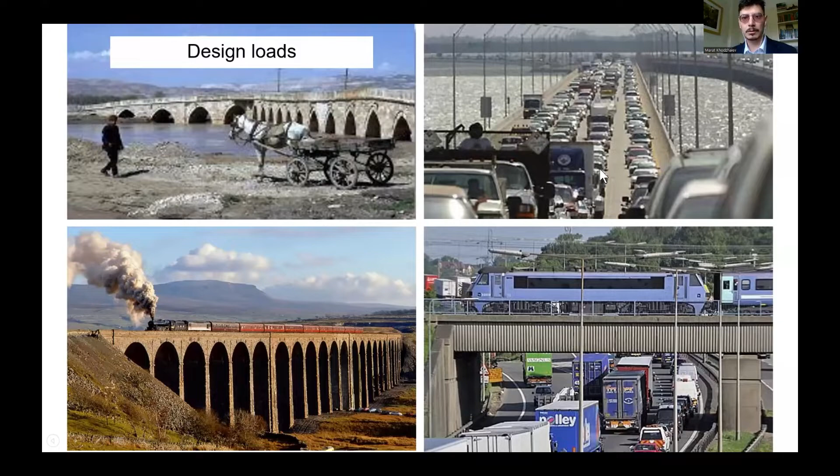So in the UK, I don't know about Ukraine, but about 40% of our bridges are masonry. В Британії більше 40% мостів кам'яні. Could I ask if you've got stone bridges, masonry bridges? Masonry is brick or stone. Do you have many in Ukraine? Чи є в Україні мости кам'яні, тобто кам'яні і цегляні? Це питання до аудиторії.

So I will answer. Yes, в Карпатах, зокрема, наприклад. There are some bridges in the region of the Carpathians, hilly regions. Є такі мости, але їх значно менше, ніж 40%. Okay, excellent, thank you for that.

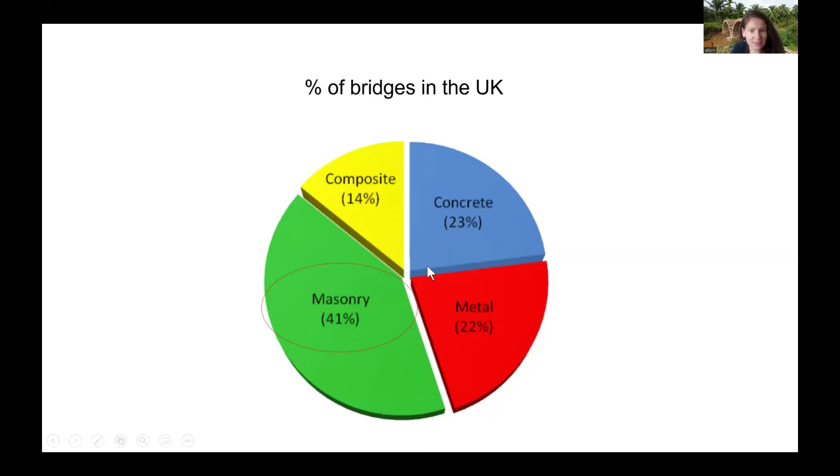So around the world, these bridges have only been built until the 1920s. В світі ці мости будувалися до 1920-х років. The technology was replaced by concrete and metal, which were quicker to build at the time. Технологія була замінена мостами із бетону і сталі, що було швидше у той час.

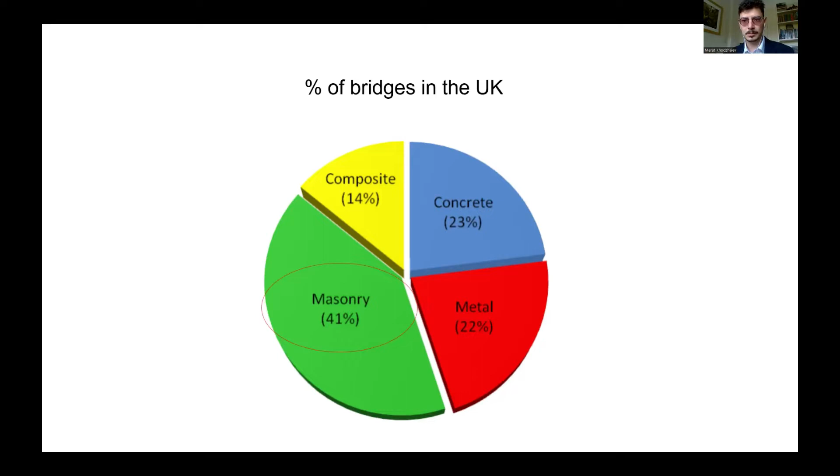So I'd like to look back at the history and how these bridges work before we get back to talk about new stone bridges.

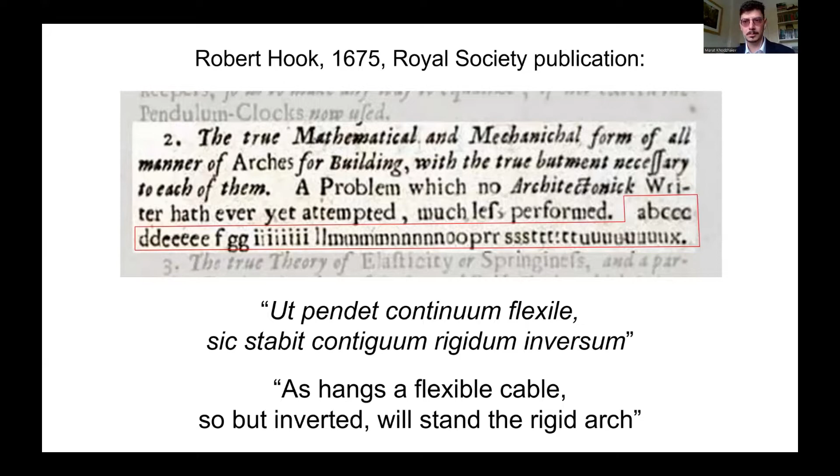Yeah, and this is basically what he's saying. So on top, everything is in compression, and at the bottom, everything is in tension.

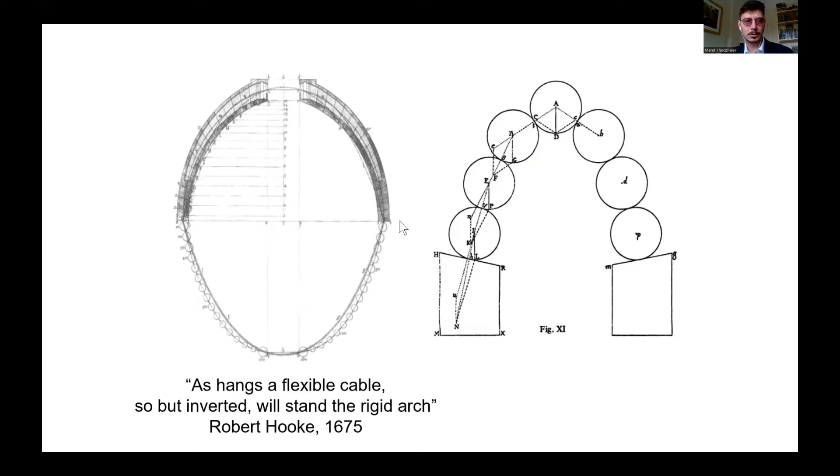So the theory is very, very simple. It can be demonstrated by strings or by stiff members.

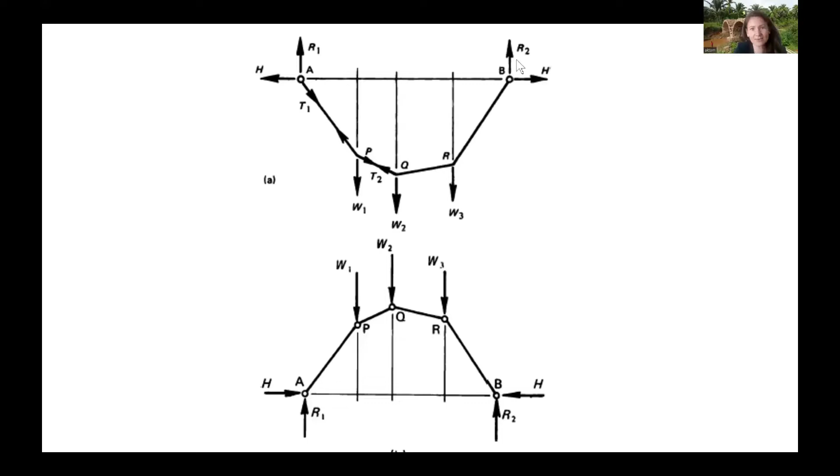And the bottom, what is that? They are stiff members, like steel members.

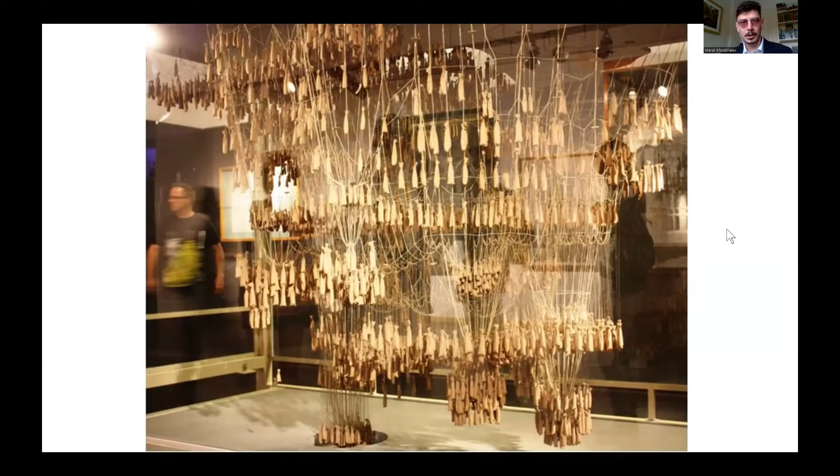Yeah, so the top is just the scale, it's just the opposite, yeah.

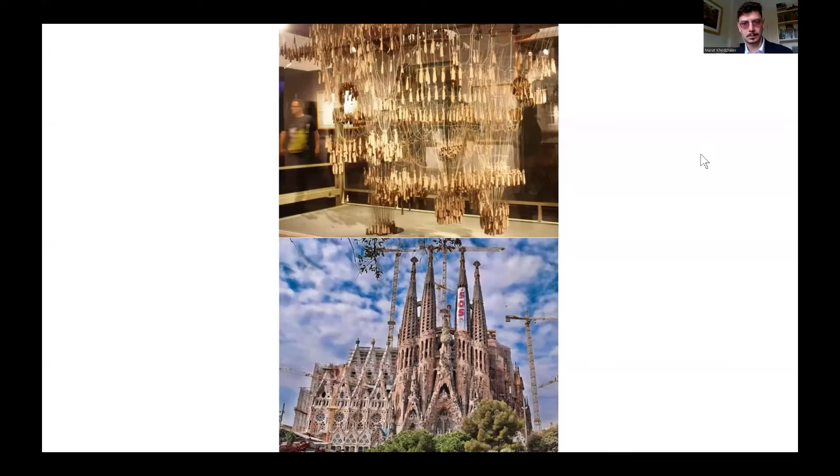I'm going to skip some of these.

I'll skip some slides. Yeah, what? Sorry, I just translated. Oh, okay, yeah.

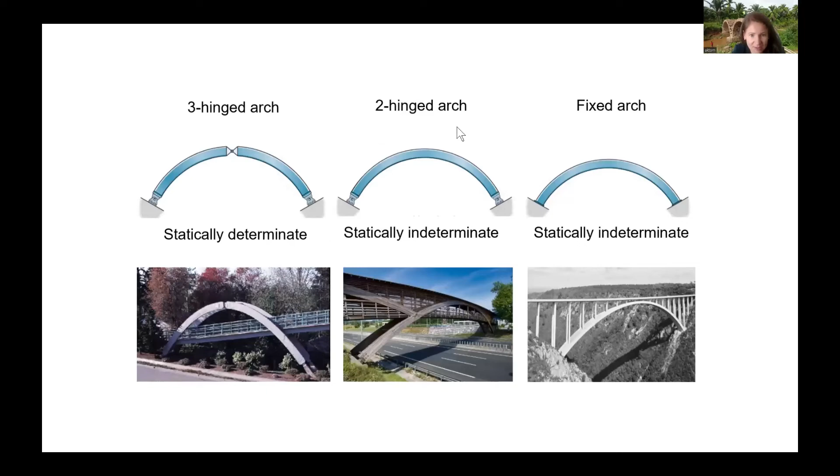So this is a drawing of how all the bridges were designed at the time.

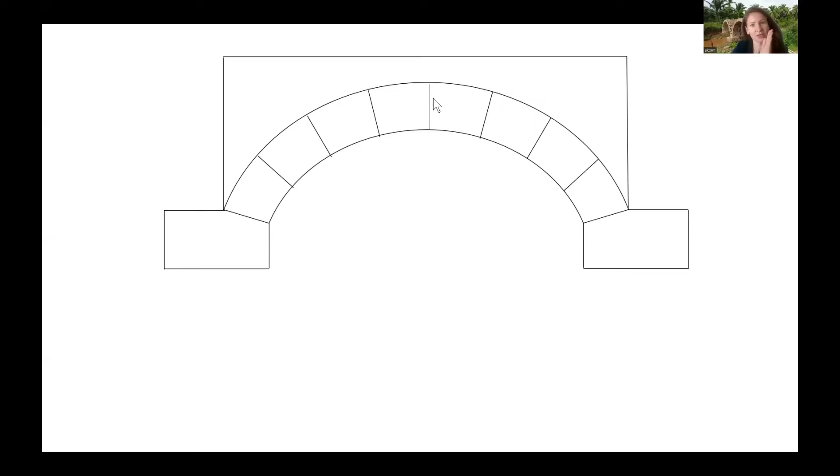You then divide the remaining section into equal segments, equal parts.

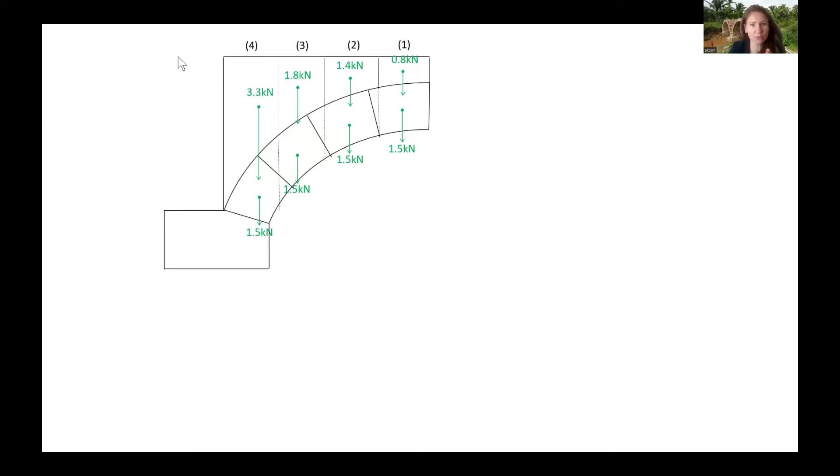Then you replace the other half of the arch with a single horizontal load.

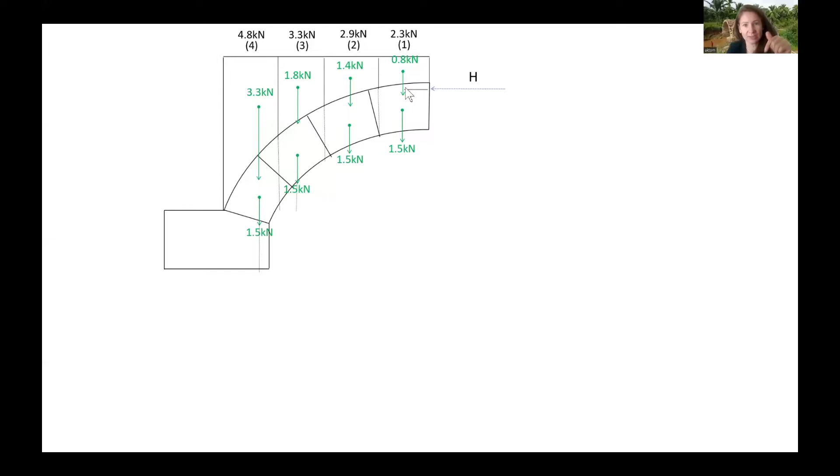You're familiar with vectors, so you just add forces together as vectors. The horizontal force will continue until it is modified or pushed up or down by another force.

The horizontal force is added together with the vertical forces of 0.8 and 1.5, which total 2.3 kilonewtons. The two added together form the black force, which is essentially the resultant vector.

So what you need to do is shift it parallel. At this point, the force starts to go down parallel to that line.

Then you add the next set of vertical vectors, 1.4 and 1.5 kilonewtons. So the resultant vector, the sum of the horizontal and all the verticals, will be the next inclined line.

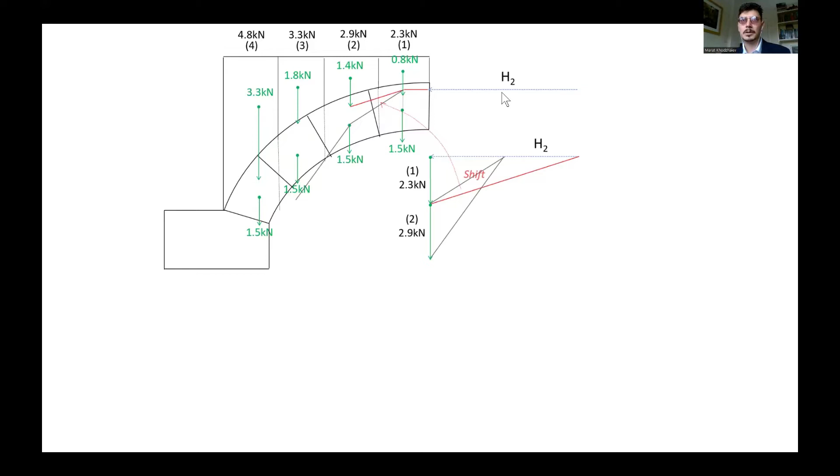In that case, you assume a bigger horizontal force. The horizontal force is only an estimate - you assume it, you don't actually know it. It's a statically indeterminate structure, so there's a whole range of forces which might work.

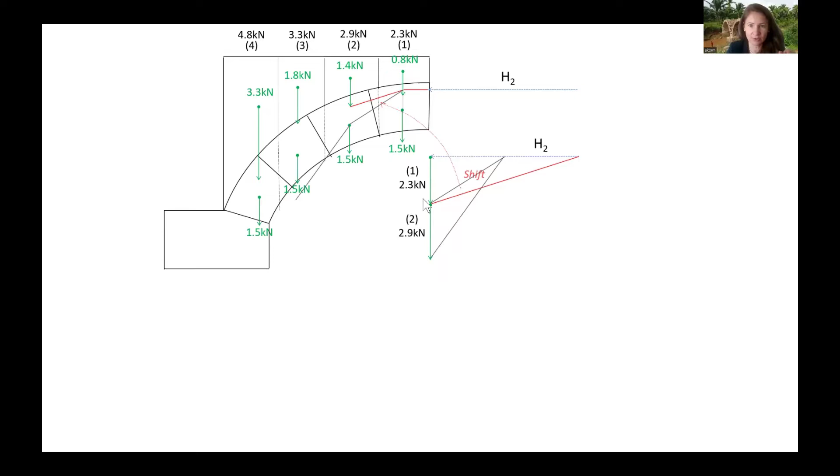So you start the game again, with a new, larger horizontal force, and draw the thrust line.

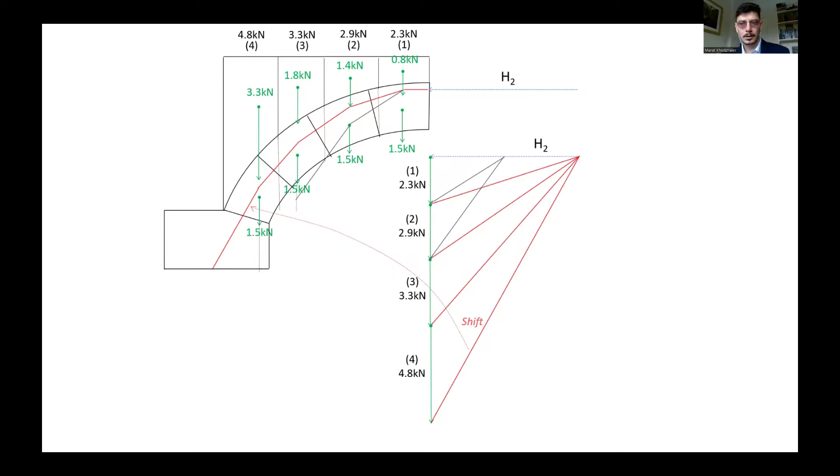So this is the theory behind the design of old stone bridges. This was used in these pictures, and it is still the theory behind current assessment software used for existing bridges.

There are two software programs typically used for assessing the strength of existing stone bridges. One is called Archie-M, and the other one is called Ring.

I'll show you in a minute.

You see the red line, which is the line of force going through the arch ring into the piers. Here you can see, for example, the load being moved from the first span to the middle span, and the red line changes slightly.

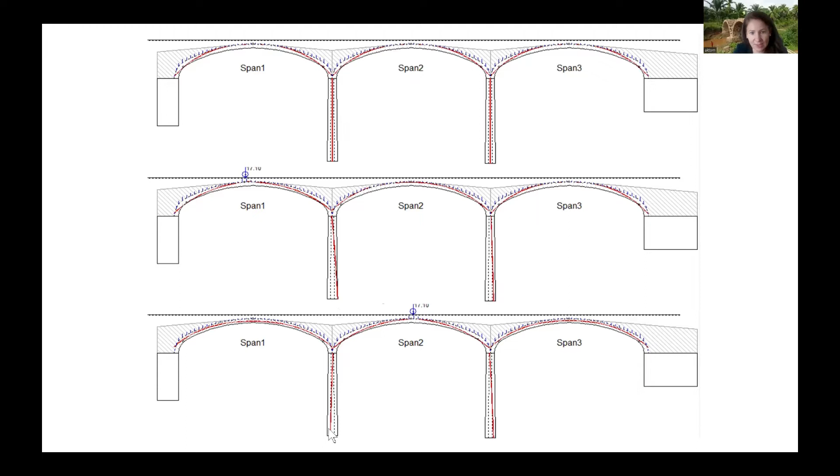For example, you can see the thrust line in the pier being pushed to the right, and here to the left, shifting between the second and third images.

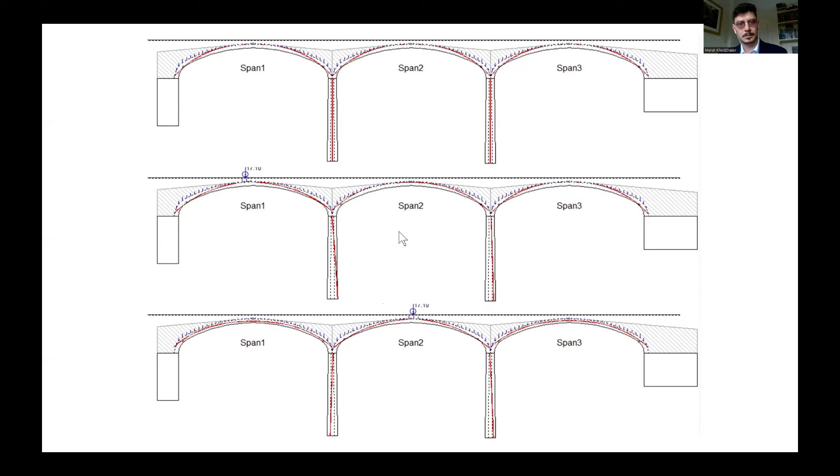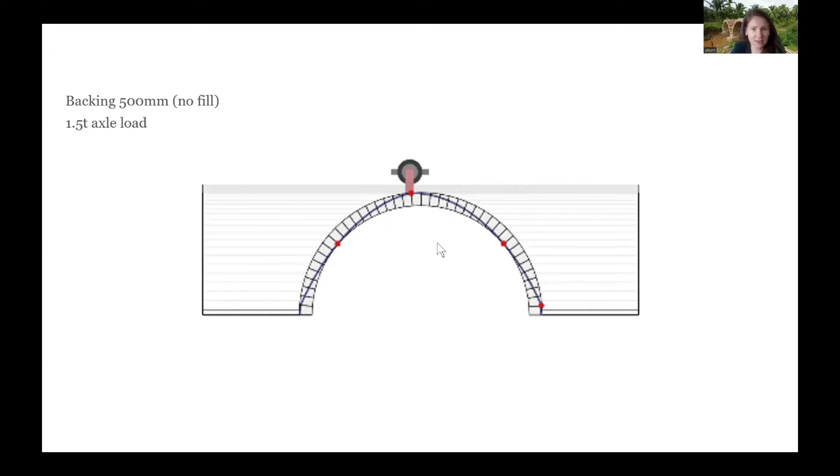The other software is called Ring. Here are some examples looking at the stability and strength of this arch with different heights of backfill.

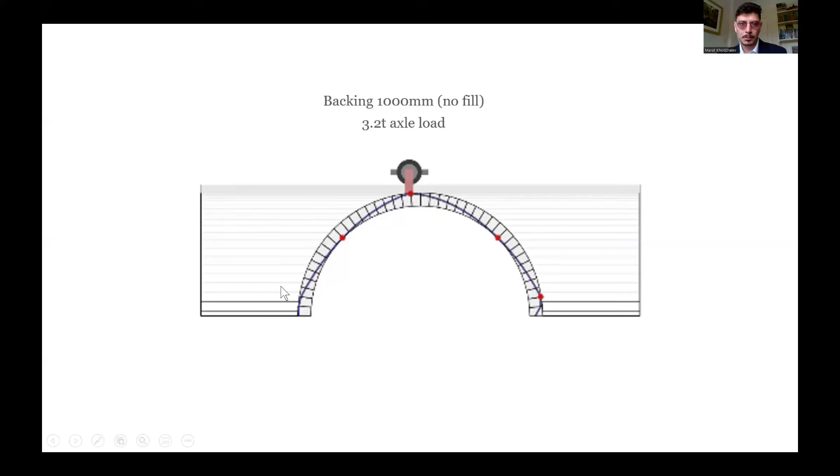As the backing level goes up, you can see the solid masonry behind the arch ring. The arch ring itself is either brick or stone, and there is typically solid masonry, brick or stone, behind it at the bottom.

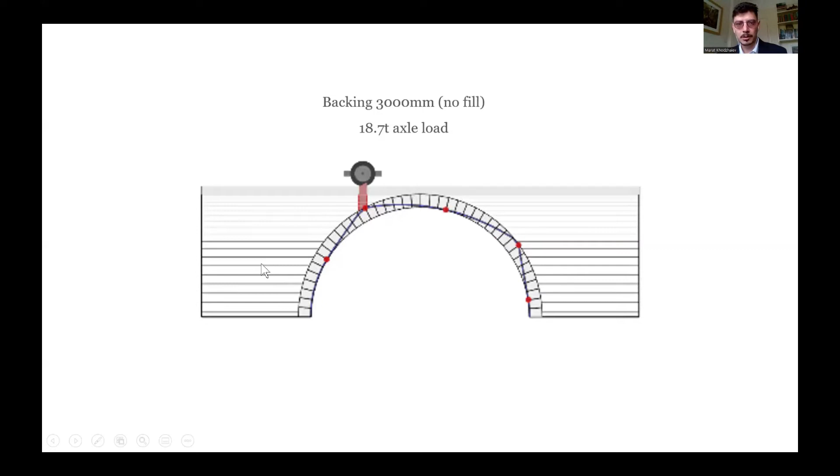Can I just clarify - you say backfilling, but that masonry part, it's not just filling, it's a kind of masonry work, yes? Yes, so it's bonded with mortar.

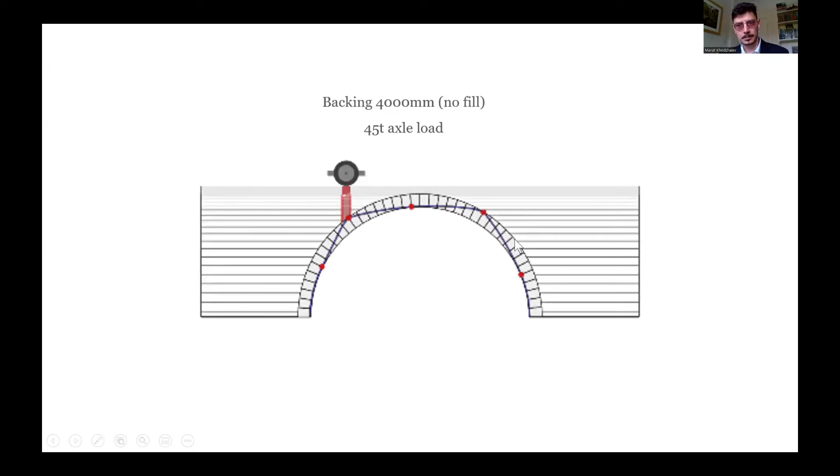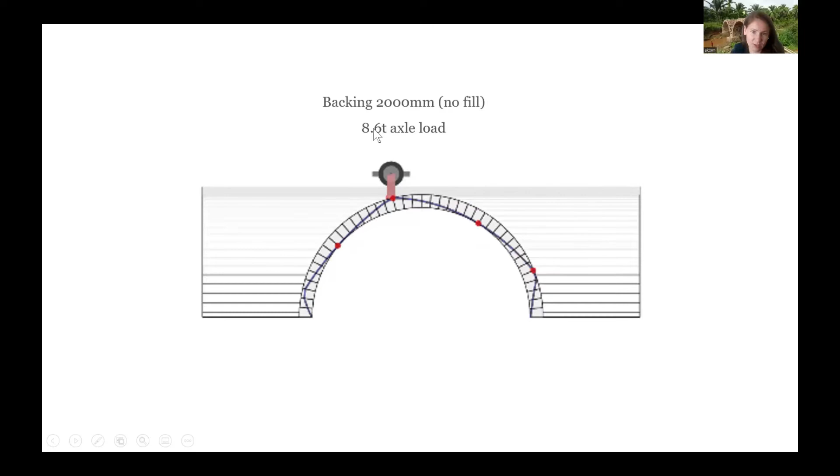And you can see how the load changes, the strength changes. For example, 1.5, 3, 8, 18, 45, and 129 - you can see how the critical force changes depending on the backing, from 1.5 tons per axle to 129 tons per axle.

So this is just a relationship to indicate that the backing is really important to make the arch stronger. And this just shows how the fill affects the strength of the arch.

So the vertical axis is the capacity in tons, and the horizontal axis is the backing height.

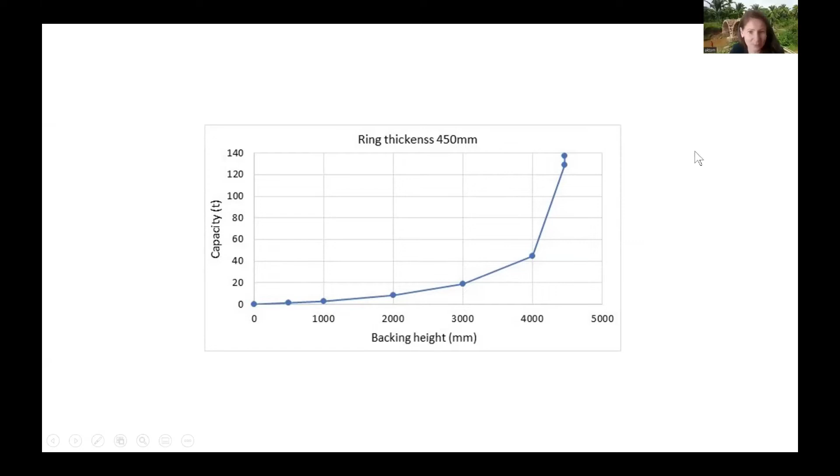So you mean that part of the backing is masonry work and part is just filling with soil, yes? Yes, that's right - part of the arch backing is stone masonry, and part is just fill with soil.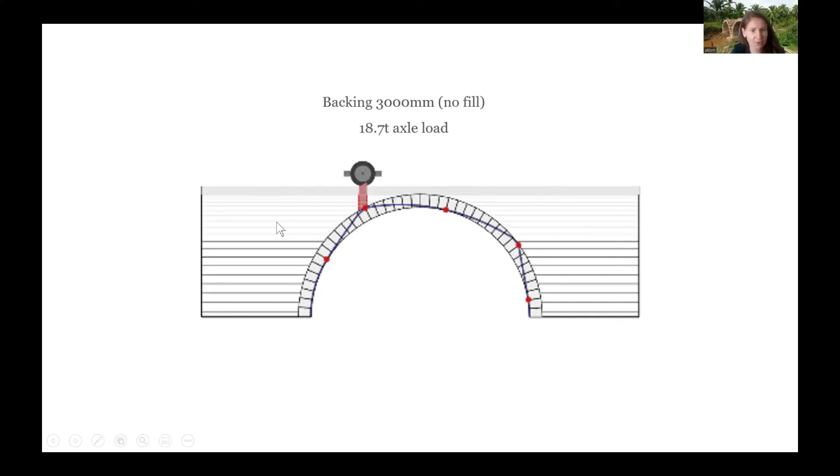So what they did when they built the bridge, the soil that they dug out from the foundations, they kept it and put it on top of the backing and the arch, using it as fill.

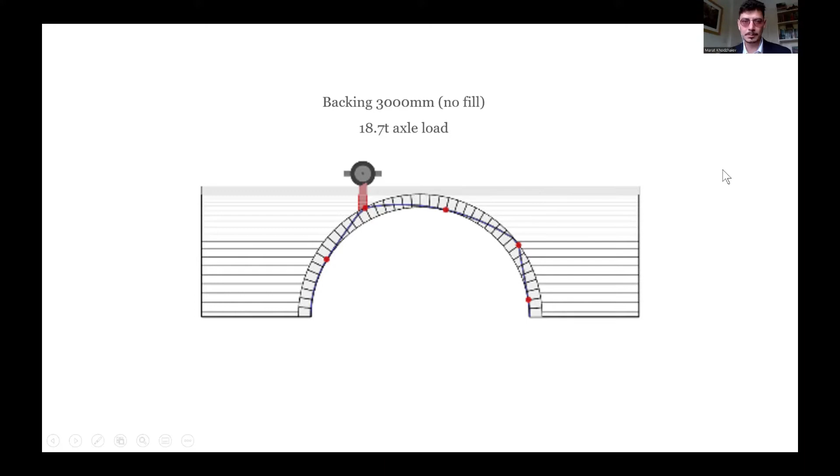Generally, the stone is very, very strong, so it's very unlikely to fail by compression.

So now I'd like to show some examples of new stone bridges being built.

I just came back from Tanzania a month ago, and I've been working with the Roads Agency and the Belgian Development Agency.

So the Belgian government started a project to build 100 stone bridges in Tanzania.

It is an agriculture project, really, to help people get to markets and sell their produce.

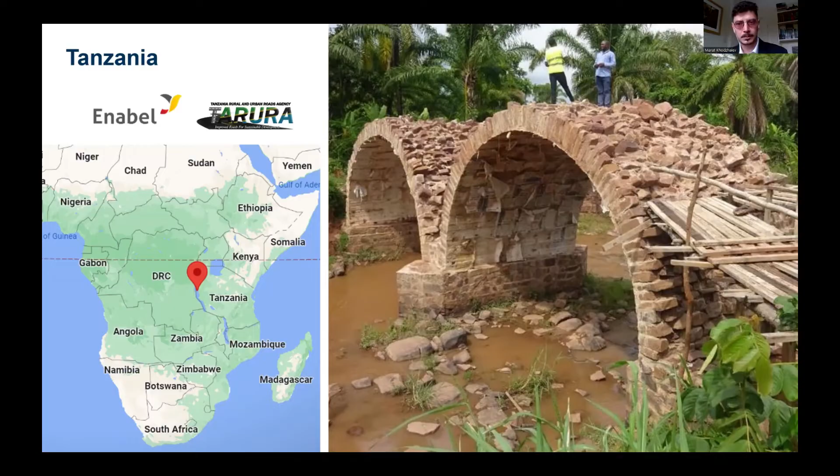So they've built about 70 of these bridges now, and I'm going to go through step by step how these bridges were built.

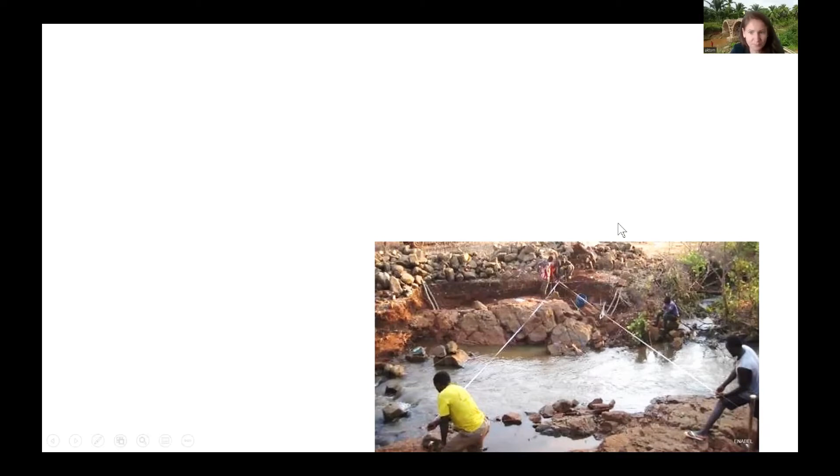So first the local community digs the foundations. It's really important that the local community is involved in the project.

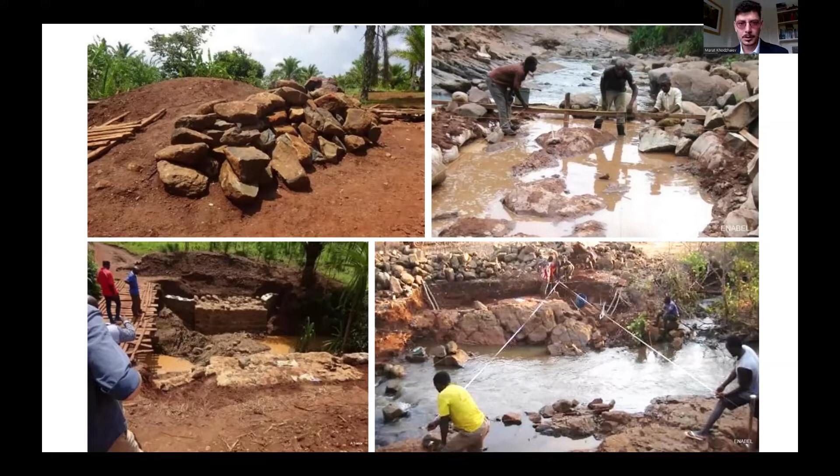The stones are then collected and taken to the site. Sometimes they bring it on bicycles and on top of their heads, just holding it with their hands.

Then the Belgian Development Agency, Enabel, provides them the centering. Centering is a scaffolding to give you the shape of the arch.

So these are wooden sections delivered to site, used and then reused for another bridge.

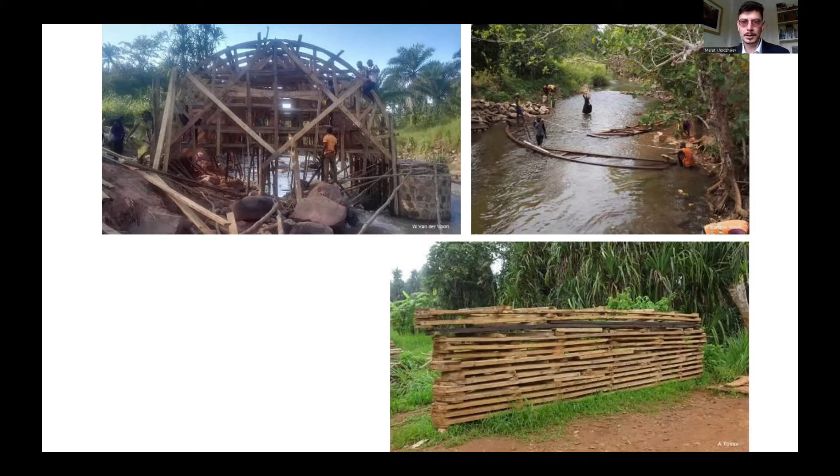You can see this called formwork or centering, put together from two little sections - you can see them here put together in the water, at water level.

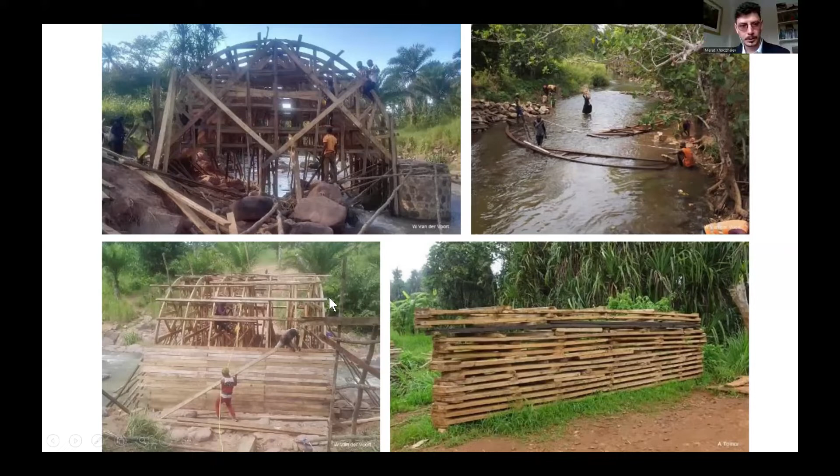And they put wooden planks on top of the arches, filling and closing in this centering.

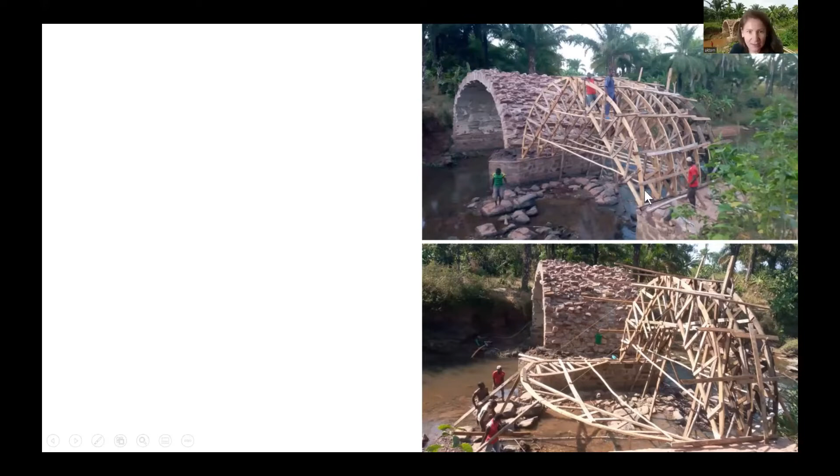Here you can see the same progress, and the arch gets built on top of it. Here's how the arch is being built.

They have to use the largest stones for the arch ring. It's really important to put them tangentially, radially from the center.

They start building from the two sides, and here they have now finished, completing the arch.

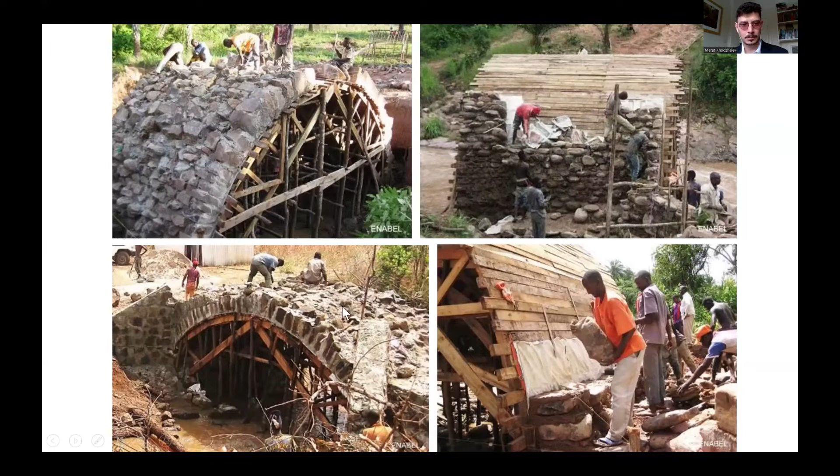Here they build the backing behind the arch.

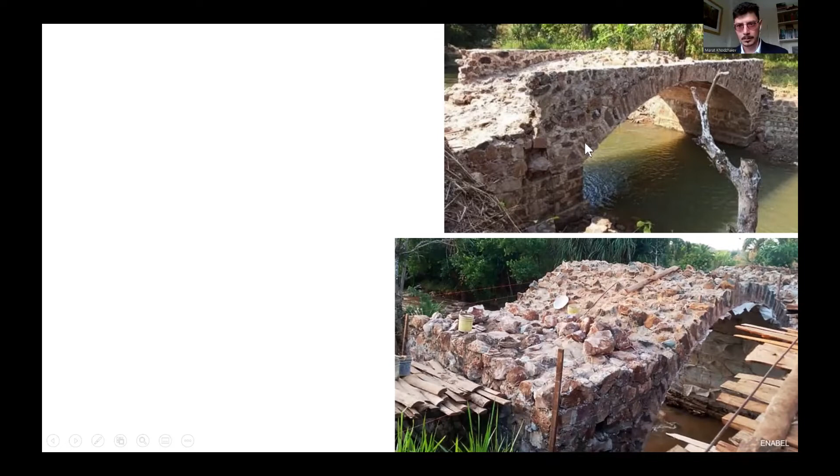Here they put a parapet to stop people falling off.

And here you can see the end of the bridge before it is finished.

And here you can see the backing as this big step.

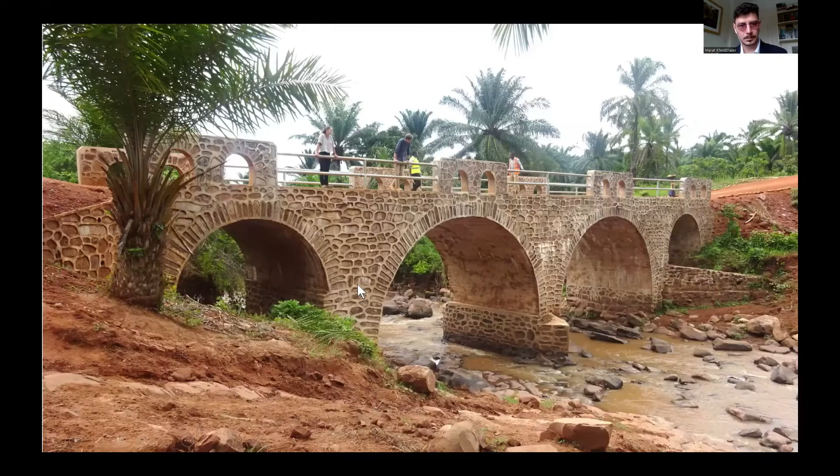This is one of the completed arches or bridges. They generally build about 8 meters span.

Stone and brick bridges are generally suited for about 10 to 15 meter spans. About 10 meters, maybe 15 meters if you want, up to 15 meters. But you can build multiple arches, many arches, to make it a long bridge.

What I love about this project is that they put together a very simple guideline. It shows people in Uganda very simply how to do it, with lots of pictures.

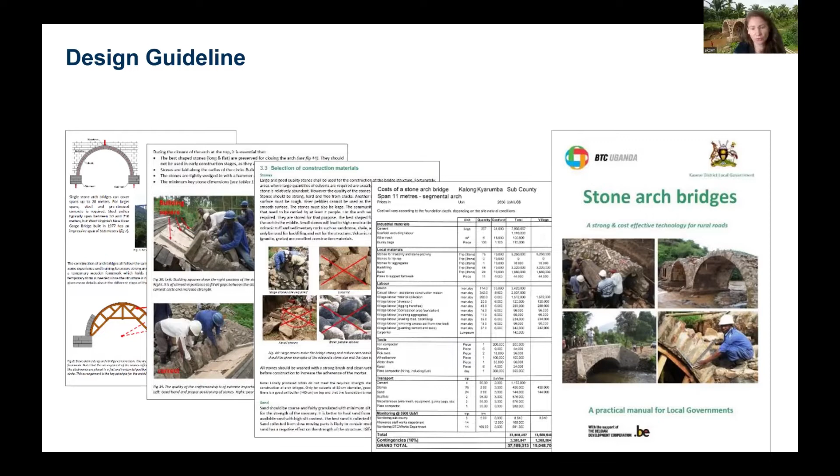So it's very, very simple to get everything ready for building such a bridge.

And in terms of design, they have two tables. One is for Roman or semicircular arches, another one for segmental, which is a section of the arch.

So if you have the height, you can build a Roman arch. If you don't have enough height, you can use a segmental one.

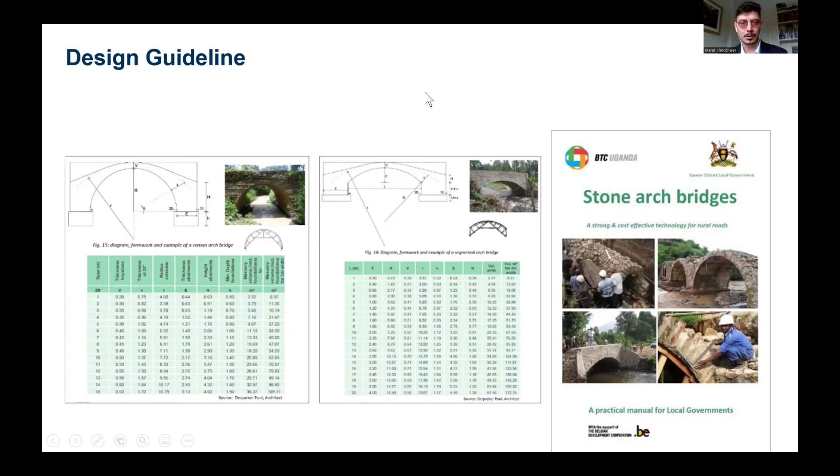So all the dimensions are included in this table.

So for example, for an 8-meter span arch, the ring thickness, which is V, is 0.45, or 45 centimeters. It also gives you the foundations.

It also shows the width of the foundations. So it's very, very quick and simple to design.

So I'd like to show that although these bridges were built in Uganda, I think they are also feasible for Europe and around the world, not just effective, but feasible for use in Europe.

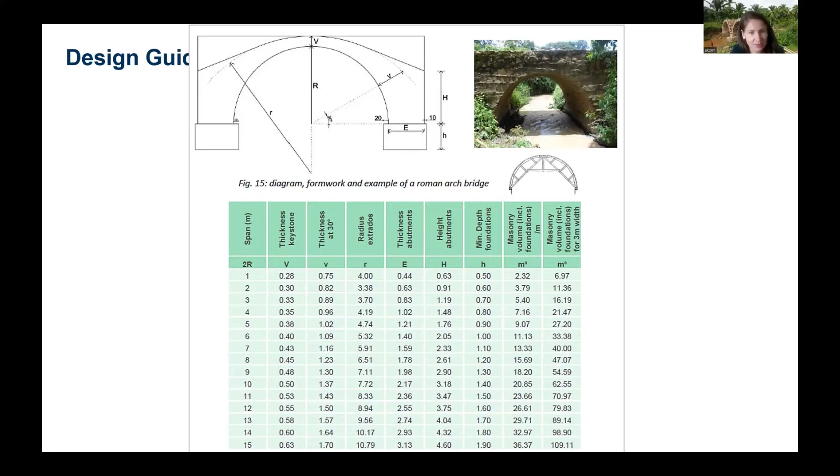We got planning permission for the bridge, but it didn't get built because of another permission issue. However, it was very useful to look into the costs.

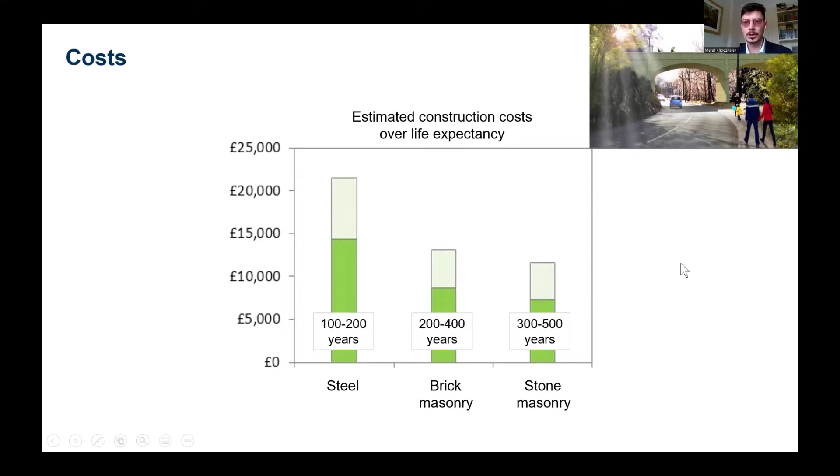Here's a quick summary for the feasibility for stone bridges.

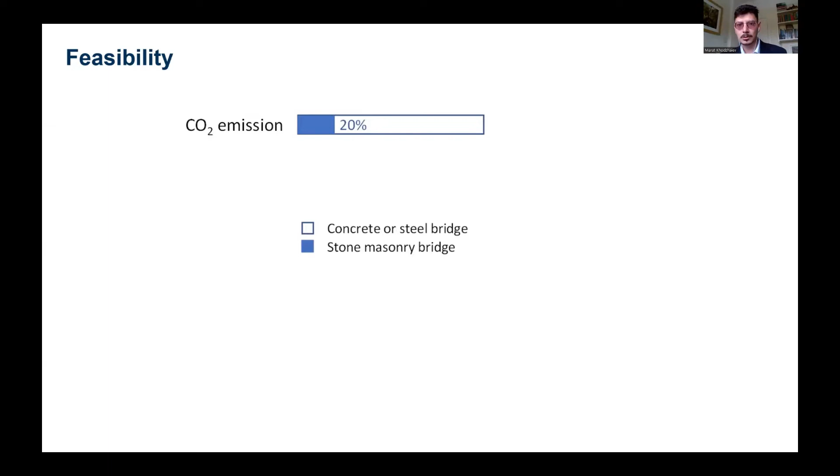So it's interesting to look at these two pictures and look at the dates between them. So how many days did it take for them to build the arch?

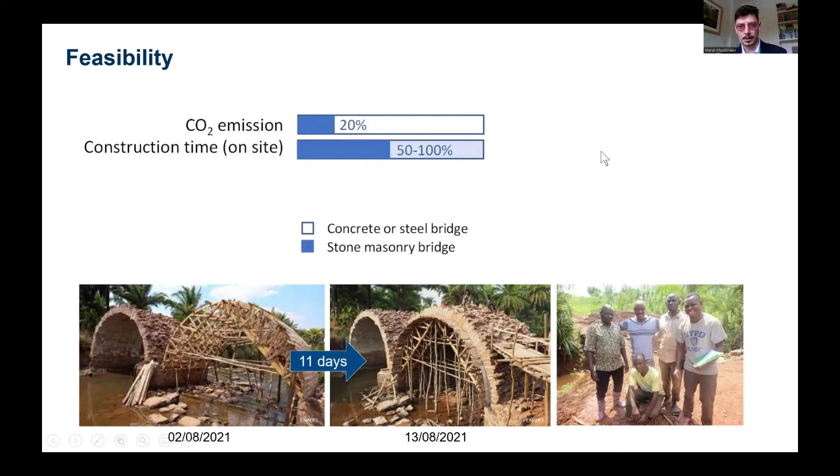In 11 days, and this is the team that built it. They have a few more helpers, but these are the stone masons. The guy in the middle is the trainer,

and the other 4 are students learning how to build these. So the trainer is a master, yes? Master yes, he's a builder, master stonemason. So it's a team of 5 people - one in the middle is the master stonemason, and the others are students learning to build such bridges.

So do you mean students from university or just... No, just stonemasons, like builders. The other 4 are just workers learning to build such bridges.

They have helpers, but not many. A small bridge, a single span bridge, they build in about a month, 3-4 weeks.

And a longer bridge they can build in 3-4 months. They've got very big floods, monsoons, so that would stop construction.

They've got no electricity on site, and they do everything manually, like lifting stone - everything manually.

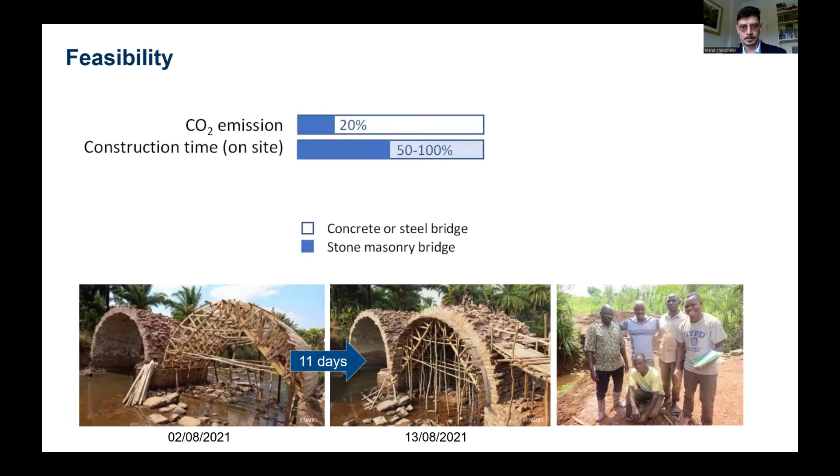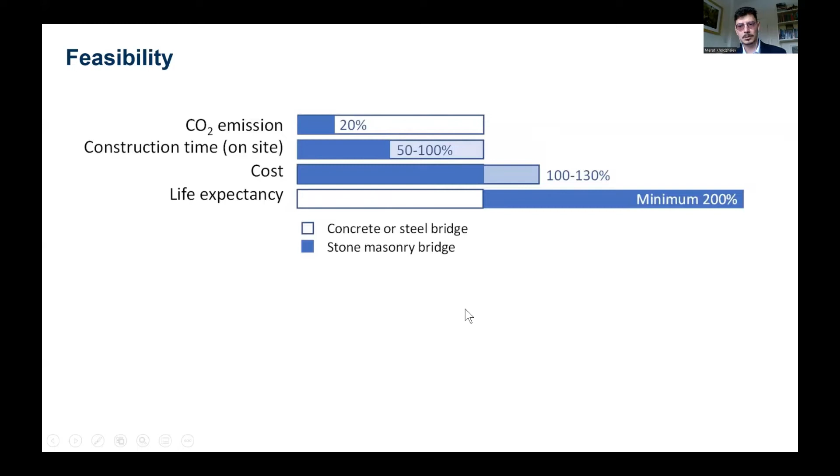And the life expectancy is probably at least twice as long.

I think this was a slide that got lost. Doesn't matter. So what I'm suggesting for the UK government and policy making, here's a summary of my suggestions.

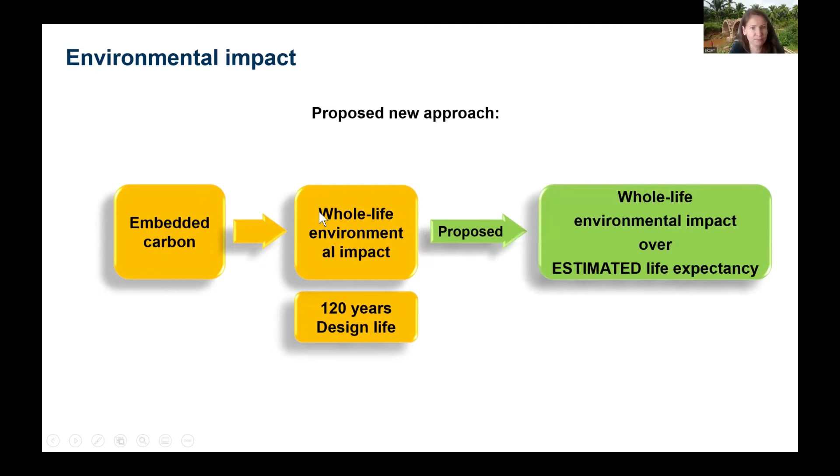So design is very much focusing on embedded carbon.

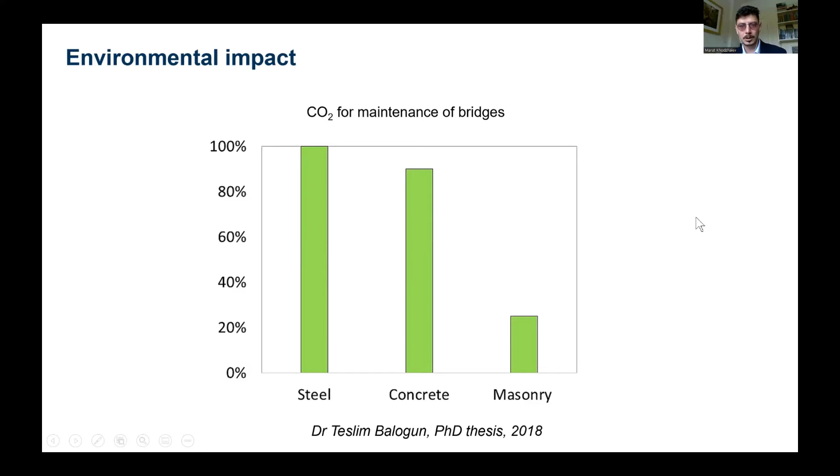So it would make sense, what the proposed approach is, to look at the whole life environmental impact.

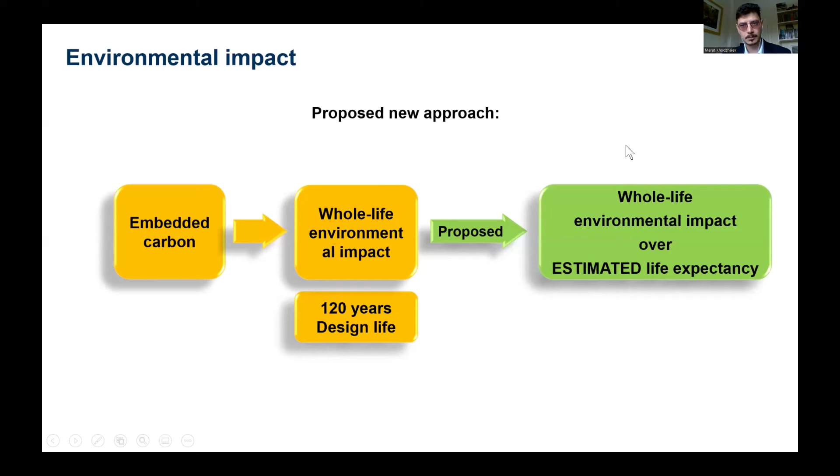Environmental impact is very much nowadays focusing on carbon.

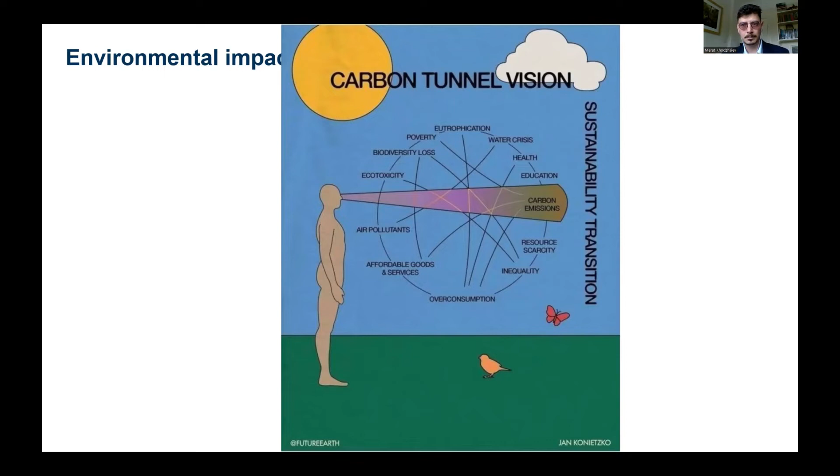And I try to collect all the benefits and all the value that stone bridges, and particular stone bridges, can offer.

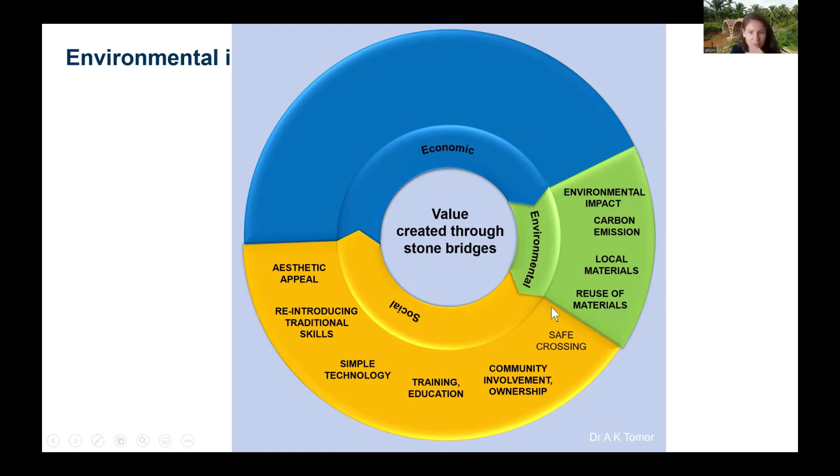For social, you don't have to translate everything, but bridges provide safe crossing. In Tanzania, they involve the local community.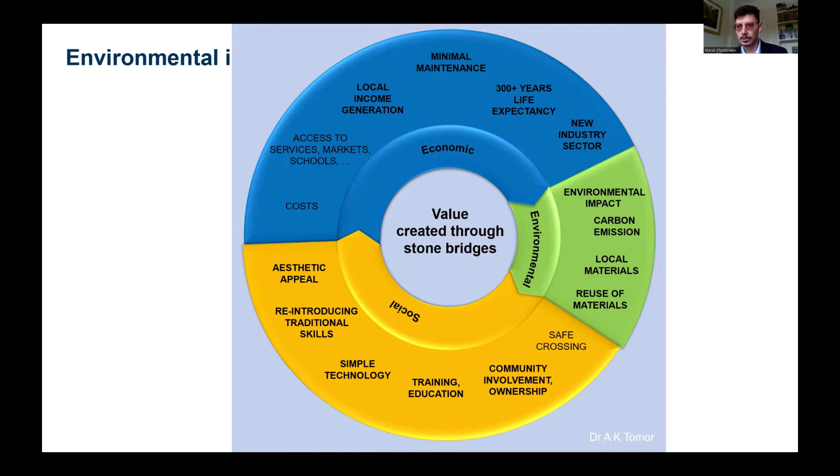The next one is only an idea.

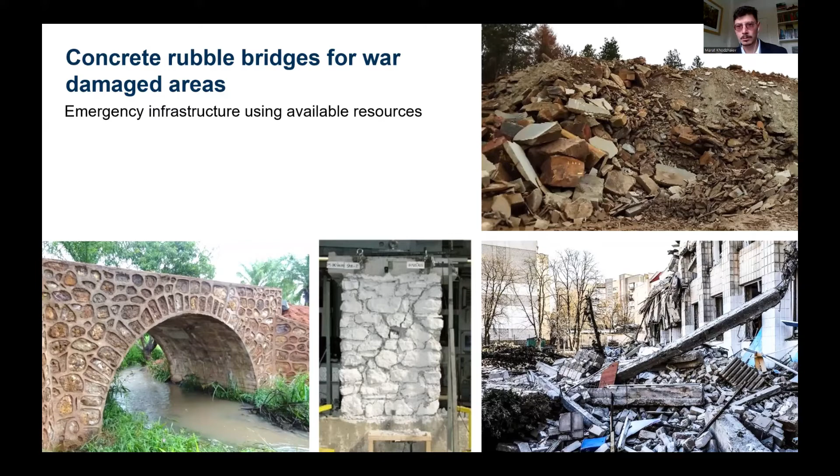The last slide looks at sustainability and other benefits. These bridges are sustainable, have low lifecycle costs, long life, and are very resilient - they last a long time, like 300 years.

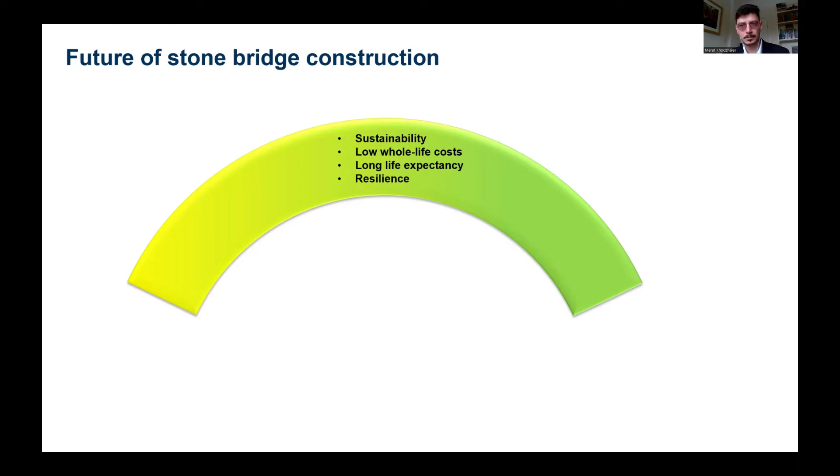The other aspect is digital technology. The two extremes are very traditional small-scale construction and modern large-scale construction. In Tanzania, they use traditional small-scale construction, but we are now modernizing the technology to make large-scale and more efficient construction possible.

Digitizing the technology might involve digital design software, digitizing and optimizing transportation or construction, and automated construction using robotics.

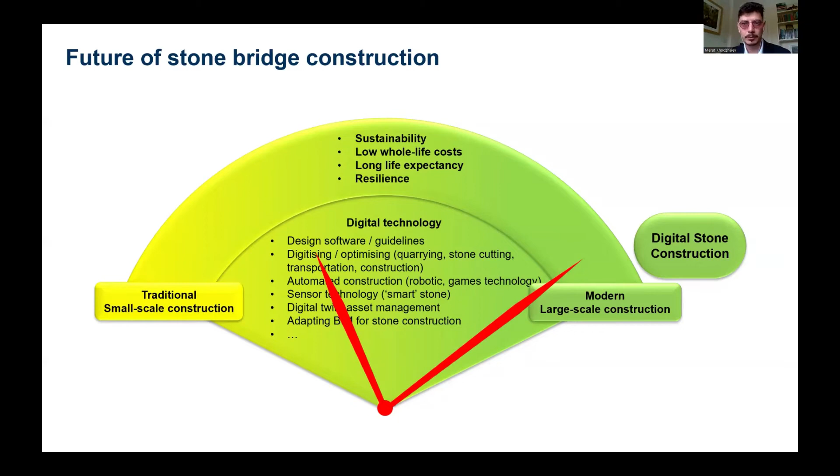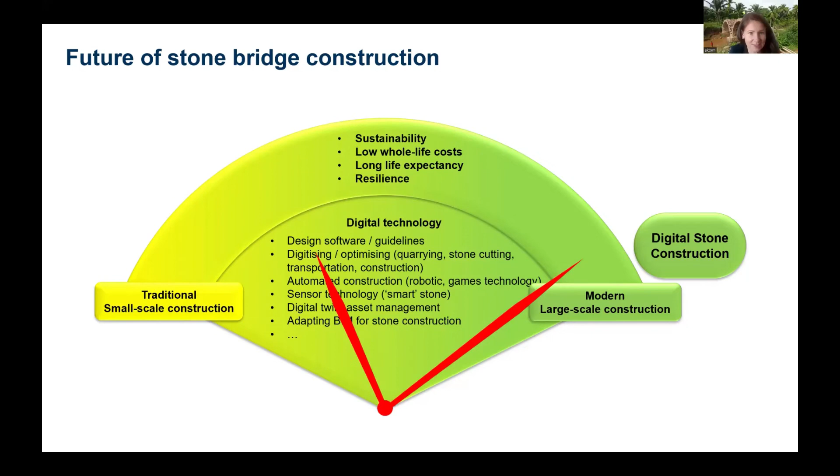And this is the vision for the future. Now, if there is anything that any of this is of interest, I would be very interested to talk to you afterwards.

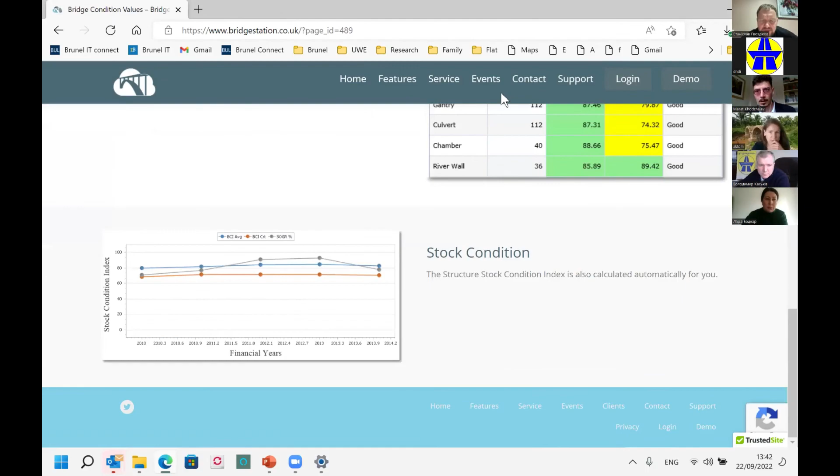Adrienn, maybe you can show any report from this program, just to look how it looks like. Let's see if I can find it. I got access yesterday, so I very quickly went in. Let's see if I can get the link again.

So you put all the documents in here, obviously. We don't see your screen. I know, I'm just trying to look through my emails. Just give me a second.

So there are two things: you need to do the bridge inspections first, and then you need to put the information about the bridge into the system. Yes, okay. Sorry about it, I need to find it.

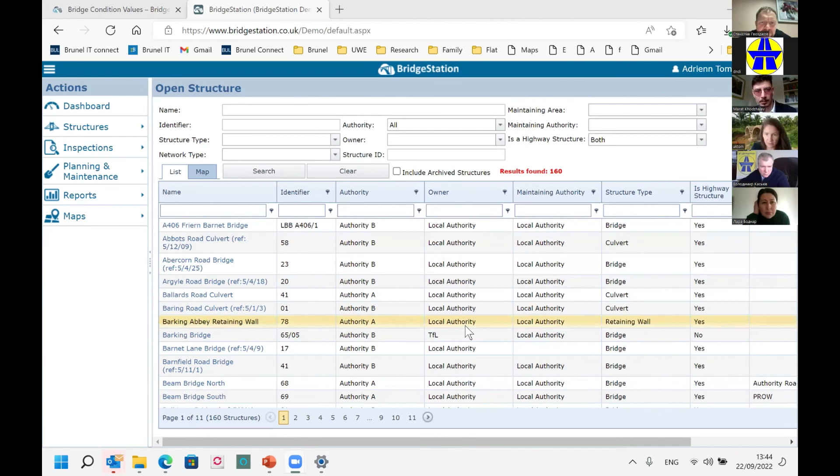Це Authority, просто приклад, ми маємо всі наші мости тут. And then you've got the One dashboard report, please. Okay, so I'm just going on the high level dashboard. It's a bit slow.

Okay, so stock condition, for example — це якби узагальнено стан мостів. Сток це всі мости ваші. This is structures with assessment results, where you've done the assessment. Це кількість — is this the number of bridges assessed?

Yes, that's right. I don't know all the indicators, but it's very easy to look through. And then this, basically — по суті, другий шкала, це кількість мостів, які були обстежені за останні 18 років.

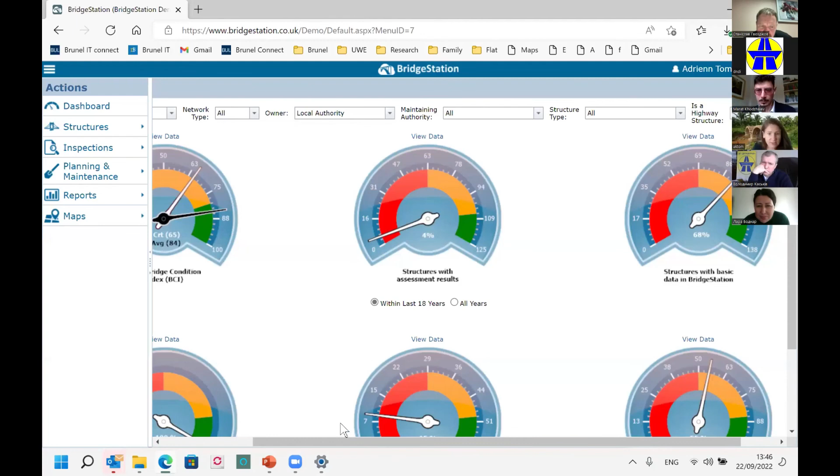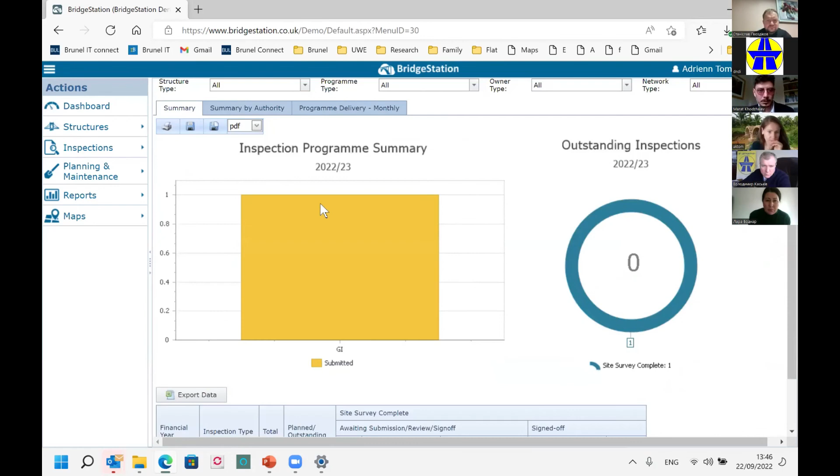I think what is interesting here is this is basically putting the information in from the bridge inspections. Тут можна завантажити інформацію після обстежень мостів. So you go out, you do your inspection, you've got one sheet, and then you put the data in here — ви переносите інформацію сюди.

So I'm not selling this, I'm just exploring what it includes, so I'm learning about it. Я не намагаюся це продати, я просто сама вивчаю це і хочу розібратися в цьому.

So this, for example, bridge condition index, that's what I mentioned — you always have the average and the critical, which is the worst part of the bridge. У нас є узагальнений показник моста і критичного аспекту моста. І узагальнений зазвичай, звичайно, краще, ніж критичний.

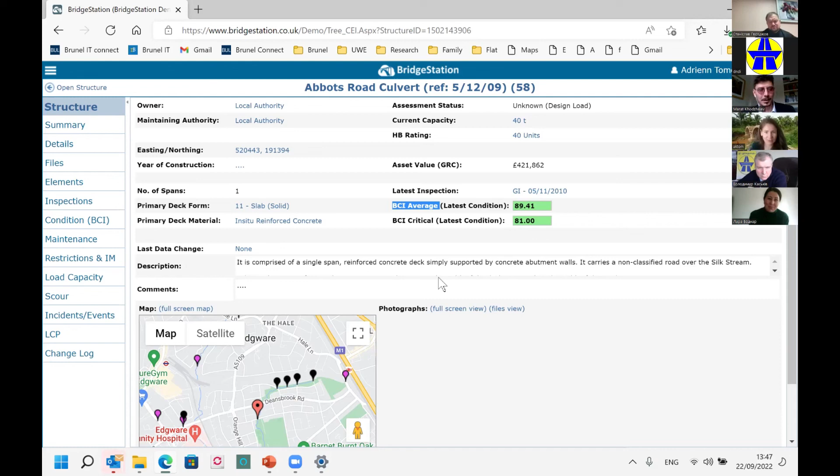And this I can show you — I'm very happy to do a separate session on how to do inspections and how the data is used for managing the network, but it is enough for another day. Very happy to talk more. Ми в інший день я залюбки б поговорила про це, це тема окремого семінару. Okay, I understand.

Колеги, ще є питання, Станіслав? Adrienn, can you send us the Belgian bridge construction manual? Yes, of course, and your presentation.